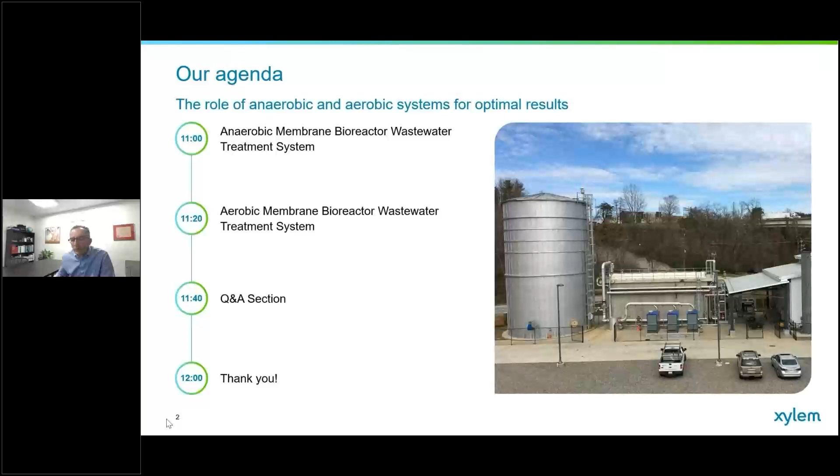Once again, my name is Jose Molina. I work in business development with the ADI Systems team, which is part of Xylem. I've been working on all kinds of biological wastewater treatment projects for all kinds of industrial customers for close to 30 years now. So I'm not an expert, but I know where to call if you have a technical question for us. I think we can try to answer and address your technical questions as we move forward.

So very brief company overview about Xylem. Xylem is a very large company. It's a recent combination of two large water companies. Xylem and Evoqua came together about a year and a half ago, and combined we are trying to have global coverage, fairly large in terms of revenue, in terms of coverage around the world, and the number of employees that work on our teams.

What we're trying to do is address our customers' needs in anything that has to do with the water cycle, whether it's on the clean water side of things or on the wastewater side, which is where I personally have been more involved over the years. Again, this is something that we endeavor to cover for our customers around the world.

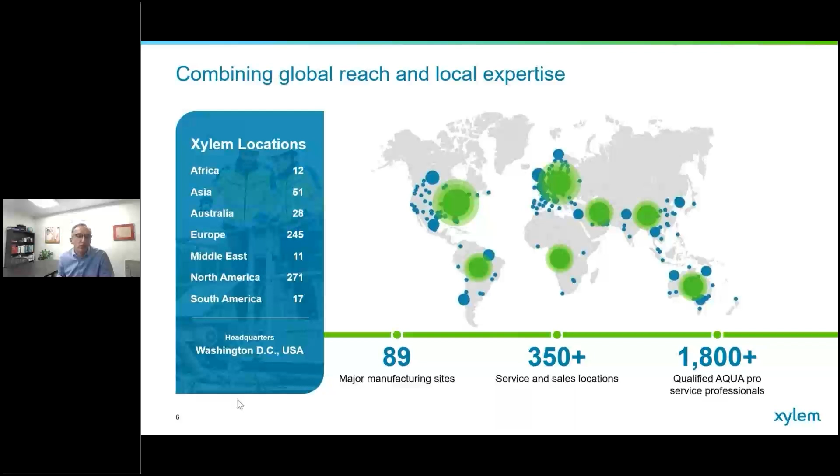So in the title of the presentation, we have the word sustainability. That's a bit of a buzzword, but I think that's something that we've lived over the years before the word was trendy in the first place. But we realized that sustainability can mean different things to different people. So just very briefly, I'll talk about what sustainability means to Xylem.

It's a big part of what we do. We make sure that we have a policy that's clear about how we as a company want to do things more sustainably, but also our effect on society. We have that outward looking viewpoint where we're trying to make sure that society itself is being protected in a sustainable way. And also we help our customers achieve their sustainability goals.

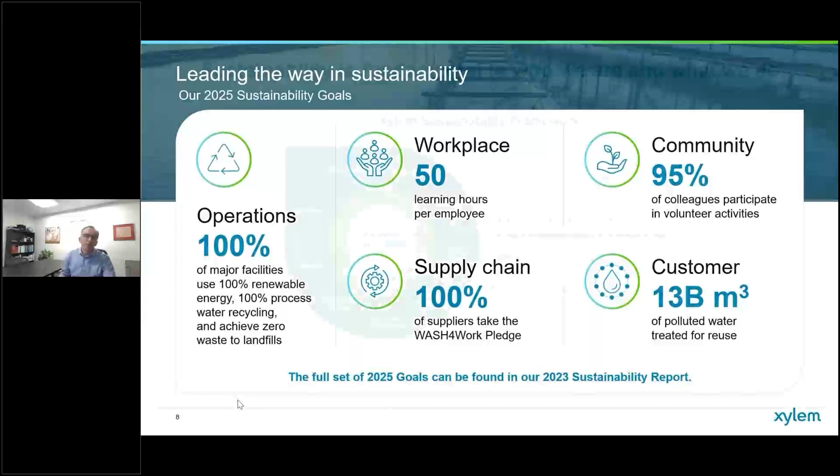So I think this chart kind of summarizes that. We're serving our customers and we're helping them achieve their targets. We realize that we don't operate in a vacuum. We operate as part of a community. So there's a lot of outreach that we do to help the community around our offices or our different sites, to make sure that we are always working with sustainability as part of our way of doing things.

And finally, as I said before, we work with our customers in helping them achieve their targets as well, in anything that has to do with water, wastewater, the whole water cycle. We're endeavoring to be part of that through all of our projects.

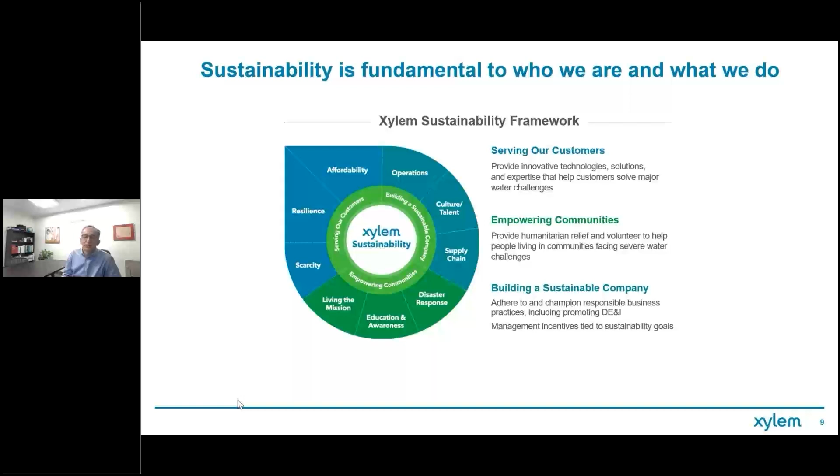So our sustainability policy and objectives are summarized in Xylem's sustainability report. The last version of that report came out after 2023. There is, of course, the 2024 report that will be released early in the new year, and you'll be able to read it and download it from Xylem's website. On the screen you see a link to where you can find our sustainability report.

Okay, getting back to our subject at hand. So our beverage customers - what does sustainability mean to our beverage industry customers?

Sustainability can mean a lot of things to you as a customer. It can be about your social commitments, or about your production processes being more sustainable - whether it's the whole supply chain, your raw materials and feedstocks, or manufacturing practices themselves always being improved with that objective in mind. Always looking to be more efficient in production, whether energy efficient or water efficient. As a user of clean water and a company that releases wastewater, you want to do it in a more sustainable, environmentally responsible way with your community.

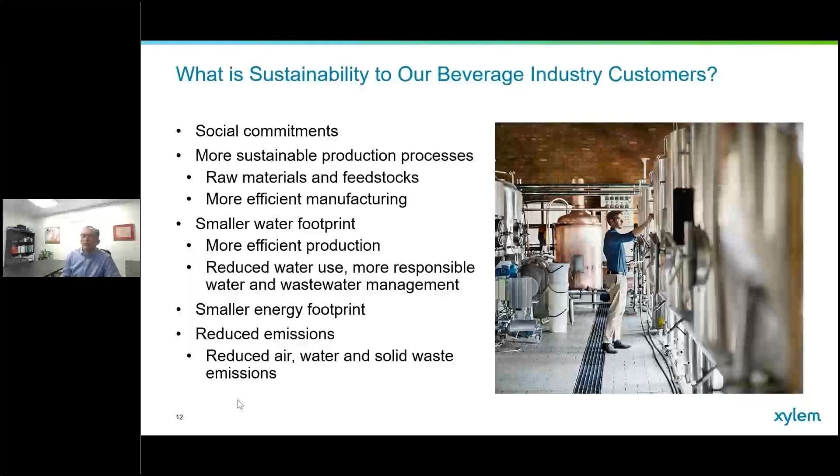As I said before, we chose a couple of examples where we can help a beverage company achieve sustainability objectives in different ways or in different categories.

In terms of anaerobic treatment, we can discuss some of the benefits you can get that address your objectives. One of them: if you're generating a wastewater that can be treated anaerobically, you're minimizing energy use in wastewater management. You're also, in some cases, recovering energy if you're treating a wastewater through an anaerobic process.

When you do that, you're generating biogas, and that biogas can be used as a source of green energy. Not only are you recovering that energy from your wastewater, but you're also reducing your use of carbon heavy fuels. If you're using biogas, you're not buying natural gas from the grid, or electricity that might have been generated from a coal power plant, for example. So those are different ways anaerobic treatment can help reduce that footprint in terms of carbon released to the atmosphere.

Also, if you're able to treat a waste stream or wastewater stream anaerobically, you will tend to generate less waste material in terms of waste solids. So you're also reducing what goes out to a landfill, for example. Those are also good objectives to meet.

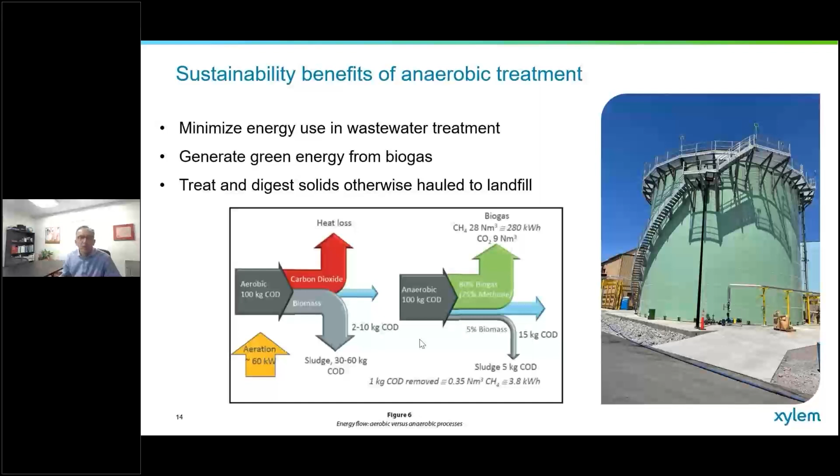So that biogas can then be used as a source of green energy back in production, whether it can be used in a process boiler or in a dryer back in the plant. It can also be used to generate electricity if the economics dictate that. And for the larger cases, the biogas can be cleaned as well and separated into its different components, and we can generate a renewable natural gas, which can then be put back into a pipeline. So those are examples of things that can be done with anaerobic treatment on a beverage wastewater. And again, we're trying to help our customers reach their sustainability objectives. This is a good way to do it.

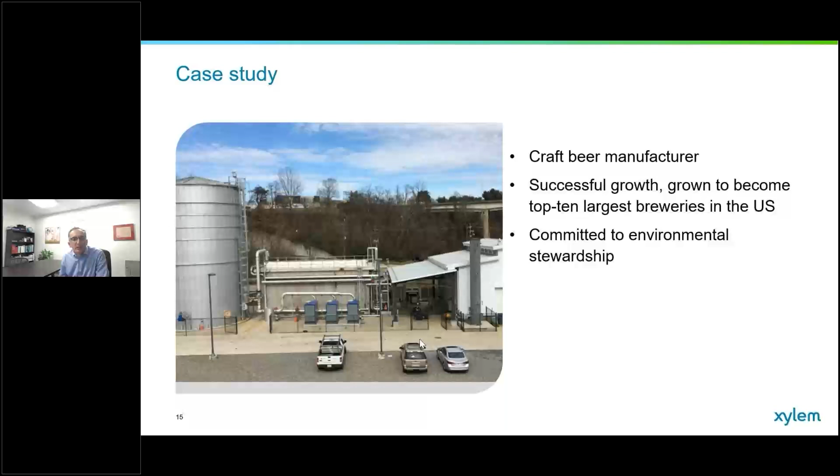So a very quick example on an anaerobic system that we've done in the past few years. This is a craft brewery in the United States. They had a brand new plant that they were building in the southeast of the United States. And of course, the company had sustainability policy and sustainability objectives that they were trying to meet. They were committed to environmental stewardship, and we were very happy to work with them in helping them to achieve those goals. So expansion was part of it. This is a medium size, I would say a medium to large size brewery that was being built. 500,000 barrels of beer is a good production level.

But they wanted to do this project and try to do it as responsibly as possible from the environmental or sustainability point of view. They also had an interest in not just meeting their discharge requirements, but going beyond that. They wanted to exceed minimum treatment requirements. And also on the solids handling side of things, they saw that spent yeast from beer making and also spent hops represented a bit of a liability in terms of having to dispose of those materials, and that would be a cost and also an environmental cost, right? So if you're transporting or you're trying to handle waste solids and sending them to landfill, that's not really the best way to handle those solids.

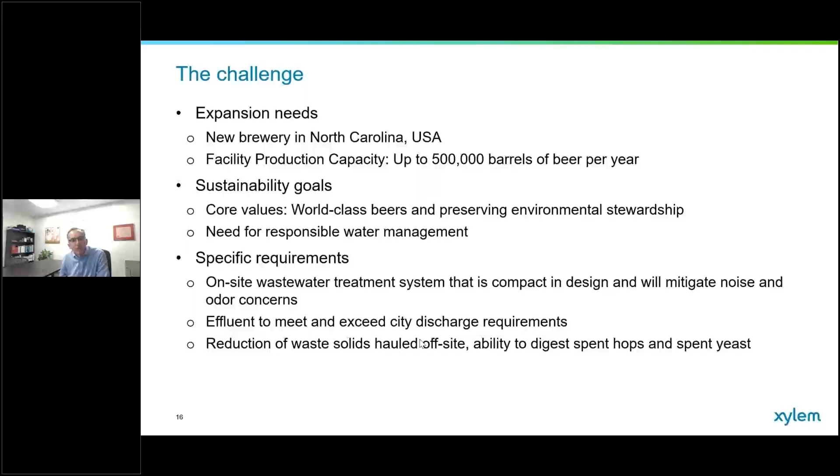So the anaerobic reactor that we designed for this customer, rather than separate and truck away, we sized the reactor such that those waste solids could be digested and also converted into biogas and into green energy. So it's a good way to reduce the footprint, not just on the emission side of things, on the water side of things, but also in terms of reducing waste solids going to landfill.

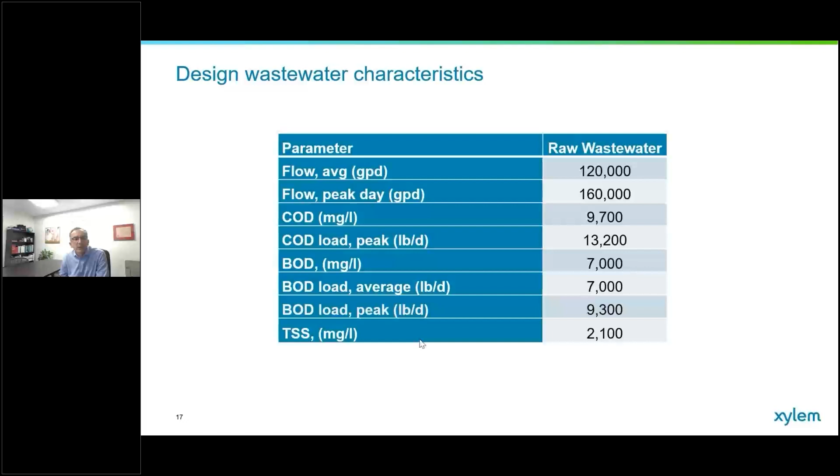Quick numbers on what the wastewater looks like. As you can see, the organic load in terms of pounds or kilograms of BOD or COD that were being generated in this plant and needed to be treated was fairly significant. And what we did for this customer on a design build basis was to build an anaerobic membrane bioreactor. I guess it's an improvement on conventional anaerobic treatment technologies, where we've added membranes as part of the treatment train, which allowed us to have a very robust system, a system that can handle the solids, and a system that can transform most of that 10,000 pounds of BOD that I was talking about into biogas, rather than having to put an energy input in terms of aerobic treatment to be able to treat that wastewater.

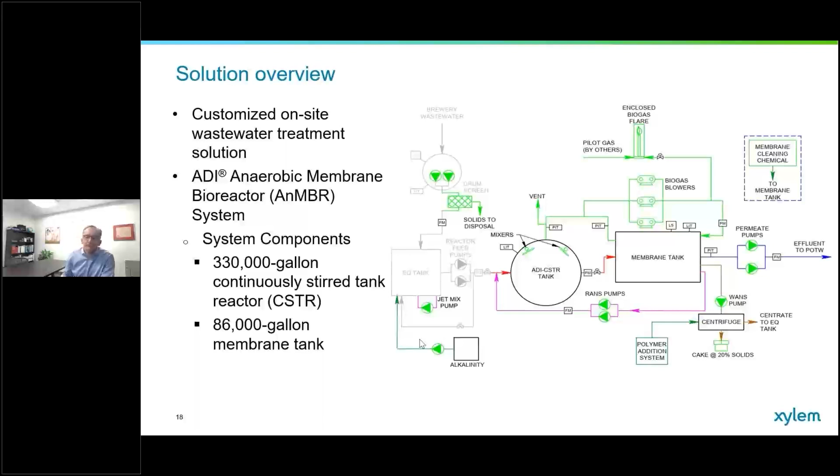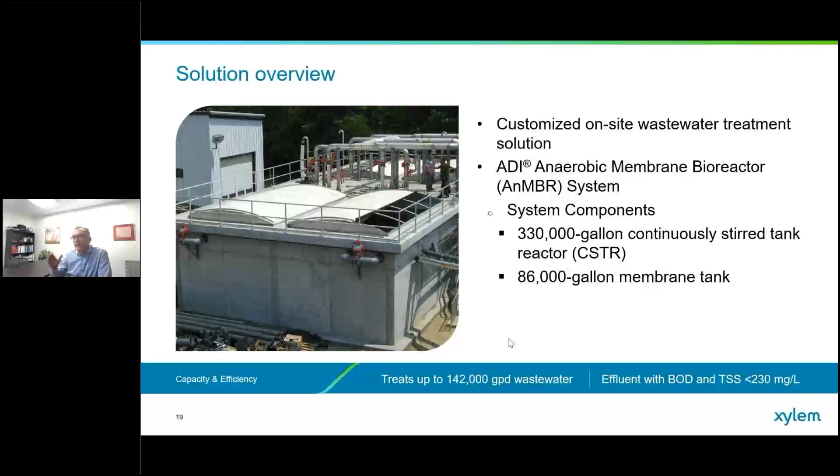So the concept of anaerobic membrane bioreactor is that we have the ability to make a more compact biological system, but the fact that we're using membranes to separate the treated effluent from the bacteria gives you a very, very high quality effluent, because the membranes that we're using to separate the liquid ensure that all of the bacteria remain in the reactor, remain in the system, and can then be used to continue to do their work, rather than losing those bacteria into your effluent.

Being able to capture the solids also means that the effluent, the treated liquid that comes out of the system, is very clean. It doesn't have any suspended solids in it, and we achieve very high COD and BOD removals through the system. So again, this is one example of where we've used flat plate membranes to do that membrane separation, to do that solids liquid separation, to get you a very clean effluent.

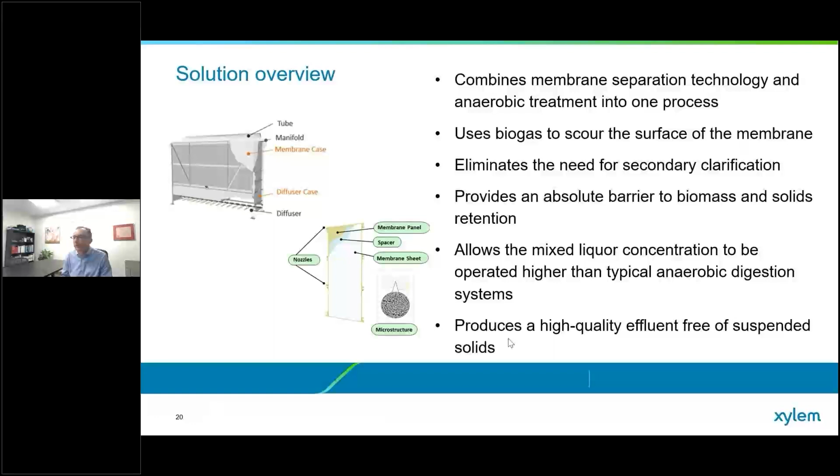So we think this has been a very successful example of being able to treat a fairly high organic load coming out of a beer production facility. We're checking several boxes in terms of the sustainability objectives being met: reduction of energy used, high quality water coming out, and reduction of waste solids that need to be handled and disposed of. So those are examples of how we can do that.

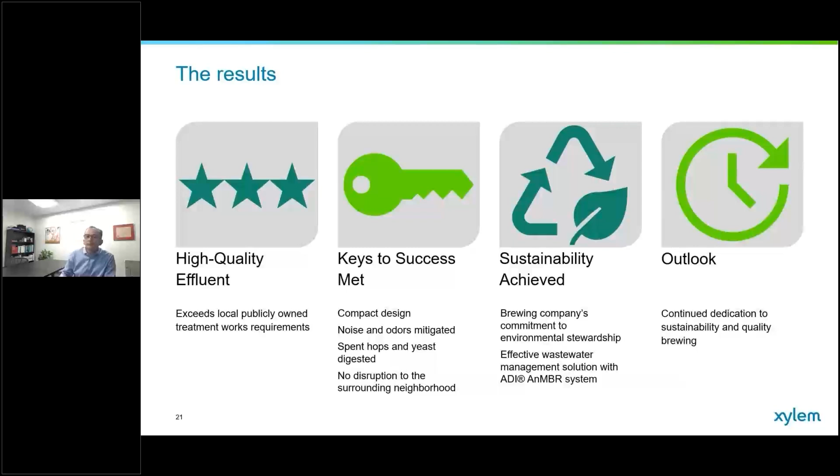I should mention, as I said at the beginning of this section, for some of our larger projects the amount of biogas being generated justifies doing the extra biogas cleaning and handling. That allows some of our customers to convert that biogas to renewable natural gas. You have to separate out the carbon dioxide and other impurities, but you can then put the biogas into a pipeline, and there's plenty of incentives out there. We'll be happy to talk to you about your particular needs to see if generating RNG, renewable natural gas, is a good option for your facility.

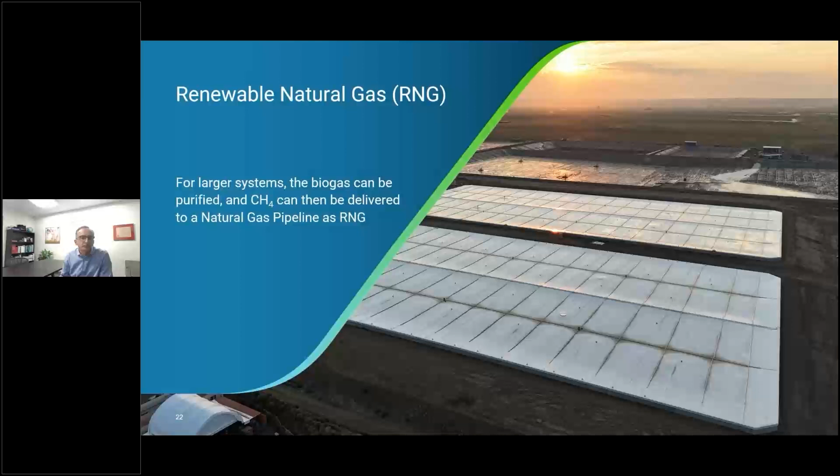Okay, so getting back to aerobic treatment - anaerobic is a good way to achieve some sustainability objectives. When you do aerobic treatment, there's also a series of objectives that can be met by doing that design right and applying the right technologies to help you achieve your treatment objectives.

So I'll go back to that chart I showed before comparing anaerobic treatment to aerobic treatment. If we focus on the left side of that chart, as I said before, there is an energy input to doing treatment aerobically, but you can do it efficiently or less efficiently. That's one thing we can work with your team on, to make sure the design of an aerobic treatment system is done with sustainability in mind - that we have as efficient an aeration system as we can, and that the equipment, pumps, mixers we use in our treatment train are selected with energy efficiency in mind, so we can continue to help you achieve those objectives.

But also, as I was saying earlier, the quality of the water that comes out of an aerobic treatment system can be high enough that you can maybe achieve different kinds of sustainability objectives. Having clean treated wastewater means it may open doors to water reuse, for example, or being able to meet emissions to water bodies and discharge water that's much cleaner for the environment, meeting direct discharge limits that, as you all know, are getting tighter and tighter with time.

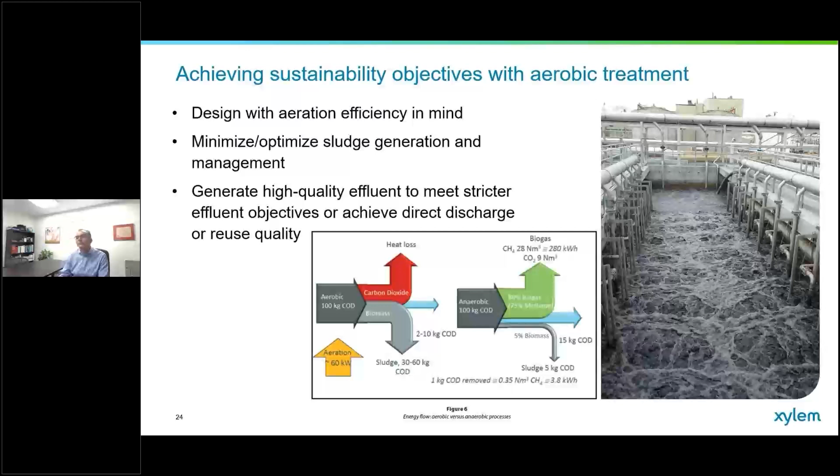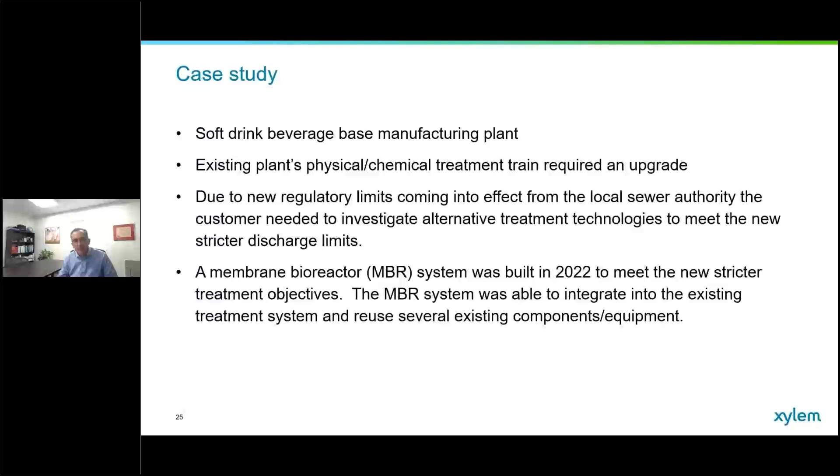So a quick example of a project we've done in the recent past on the aerobic MBR side of things - aerobic treatment achieving fairly high quality - is a beverage plant in the US, where the plant was being asked to meet a more stringent BOD, nitrogen, and especially phosphorus objective for discharge. The solution consisted of, again, a membrane bioreactor. In this case it's an aerobic membrane bioreactor, but it's a similar concept to the one I described with the anaerobic system. Just very quickly, what is an MBR?

A membrane bioreactor is a variation or an improvement on a more conventional activated sludge process. As you know, with activated sludge you're using a consortium of bacteria aerobically, so you're adding air to those bacteria so they can do the work. As the bacteria receive air and food, they can do that conversion and cleaning of the water so that you can reduce the organic matter that goes out to your final effluent.

Typically, the design of an activated sludge system is based on how much bacteria, how much biomass, or how many workers you have to do the treatment, and that's limited by volume. So the larger the system, the more bacteria, the more workers you have, the more wastewater load that you can clean.

So of course that means you need a lot of space to do your biological treatment. Another bottleneck in the design of conventional activated sludge systems is that you have to separate treated effluent from the bacteria, because you want to keep the bacteria in the system. Normally a conventional treatment train requires gravity settling, so your bacteria settle to the bottom in a secondary clarifier so they can be returned to the main treatment train, and then you release clarified effluent. So the bacteria stay, clean liquid goes out to discharge.

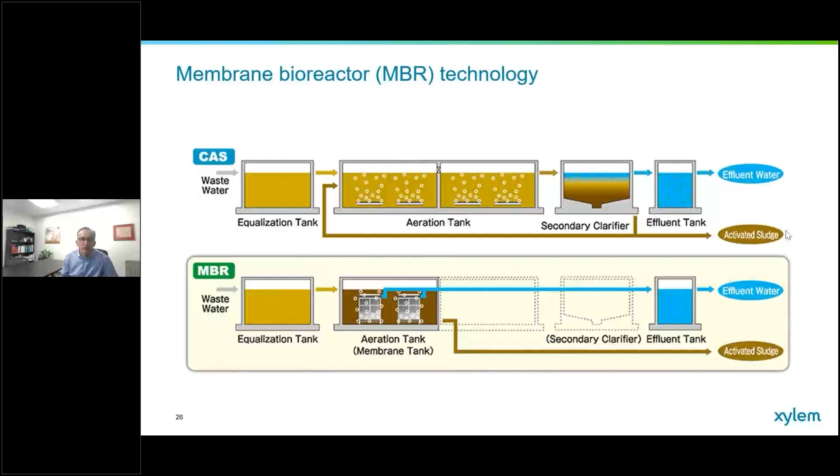Those are huge benefits that you can get by doing that. And of course, the fact that the membranes are capturing all of the solids in your final effluent means the water has a much higher quality because there are no solids in it. Very low BOD - the level of BOD removal you get is much higher than you have in a conventional system. So that means you're checking off more boxes from the sustainability side of things.

We use air that we bubble in through the bottom of that membrane cassette, and as the air bubbles rise in the liquid, they create a scour effect that keeps the membranes clean. And you get a cross flow effect, so the clean effluent goes through, and the sludge keeps getting recirculated inside of the reactor.

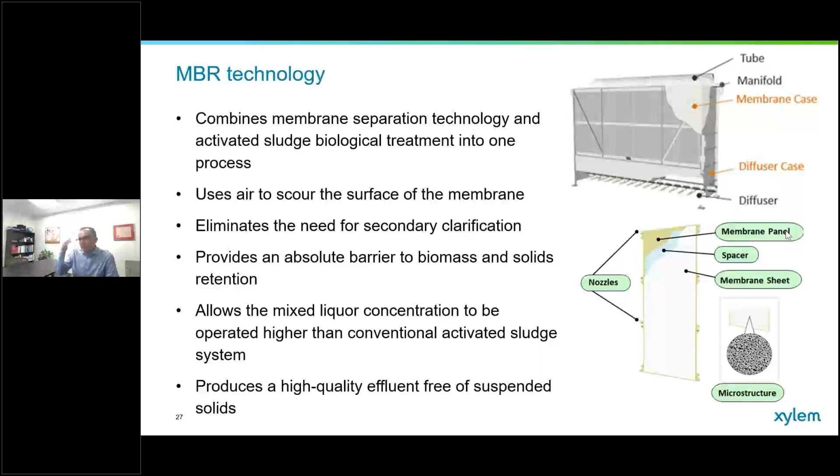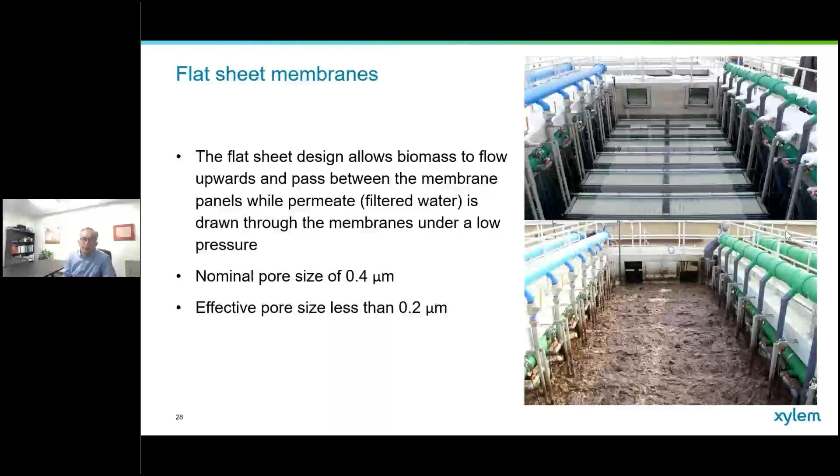And as the liquid goes through the membrane pore size, which is very small, 0.2 to 0.4 microns, what you have going through is a treated effluent with no suspended solids in it, and very high removal of nitrogen, phosphorus, and BOD.

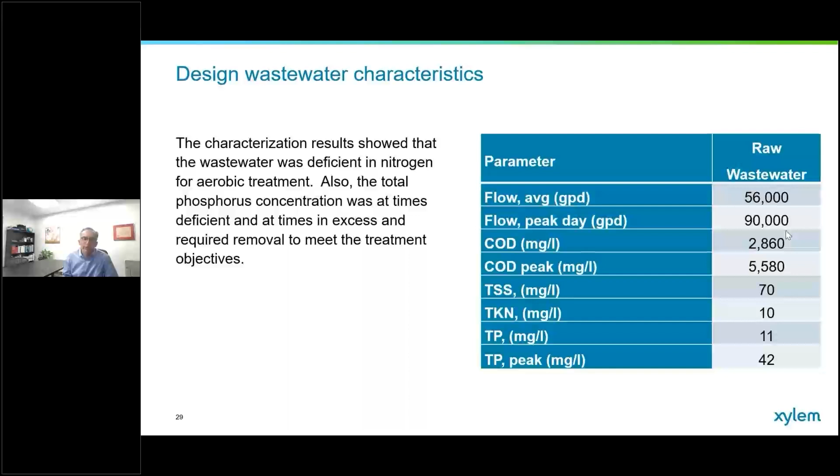So this is a wastewater that's still quite concentrated, maybe not strong enough to justify anaerobic treatment. But again, we are chasing other sustainability objectives in a different way. It's aerobic treatment - it's not as energy efficient as anaerobic treatment, but we can still do it as efficiently as possible while meeting other objectives, for example having water that's so clean that maybe it can be reused back in the process.

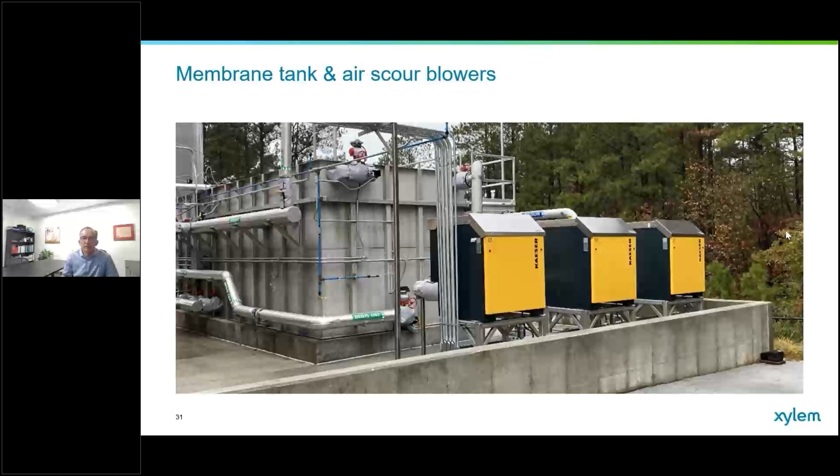As I said before, the air keeps the membranes from getting plugged up with sludge, so that the air creates a cross flow that cleans the water. But still, every few weeks or every few months, you might do a clean in place. You don't have to take the system down, you actually just stop flow for 2 or 3 hours, and you can do a clean in place with chemical, whether it's an acid clean or a hypochlorite clean. It's just done from time to time to remove material that might have started to get stuck on the little pores on the membrane.

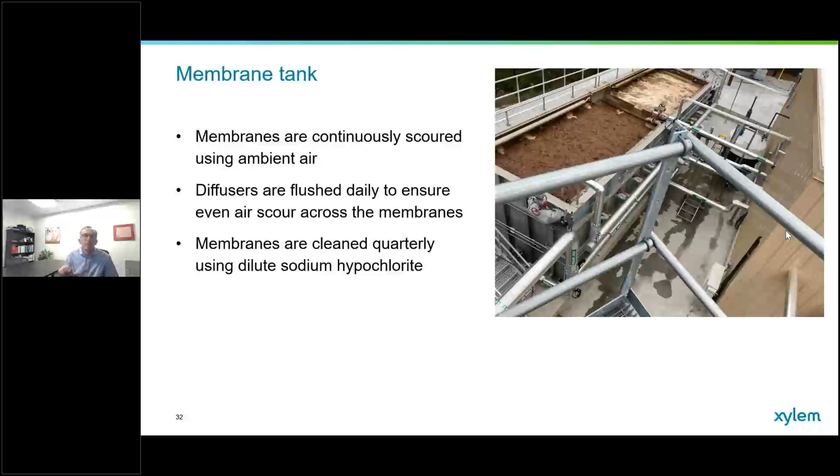Likewise, we were able to meet the total nitrogen limits that had been imposed, as well as the phosphorus limits. With phosphorus, we know that we're removing some of it biologically because the bacteria, as they grow, will absorb some of that phosphorus for meeting their growth needs. But there will be an additional phosphorus removal step by adding a coagulant, whether it's ferric chloride or alum, to precipitate it out with the phosphorus.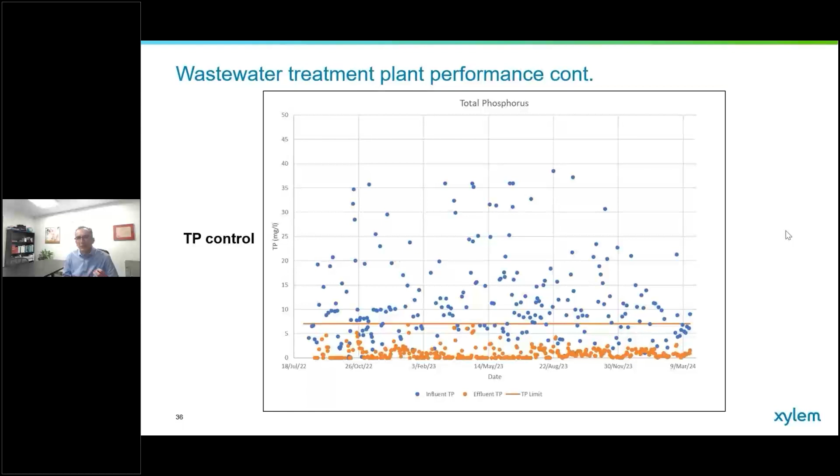The great thing about a membrane bioreactor is that once you've created that chemical precipitated sludge of aluminum phosphate or ferric phosphate, we can capture those solids because we have the membranes keeping them from going out in your effluent. So having no suspended chemical sludge, and the bacteria also staying in the reactor, means that we can meet less than 1 ppm phosphorus limits. In some cases, we can remove another order of magnitude and meet quality more in the range of 0.1 or even less milligrams per liter of total phosphorus.

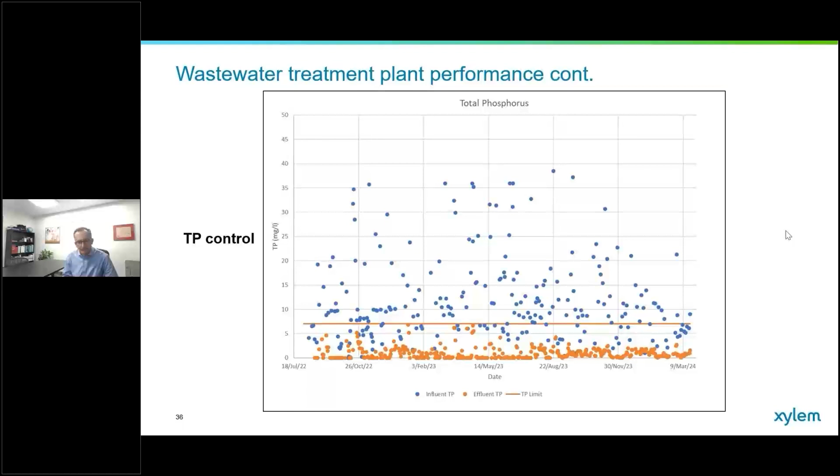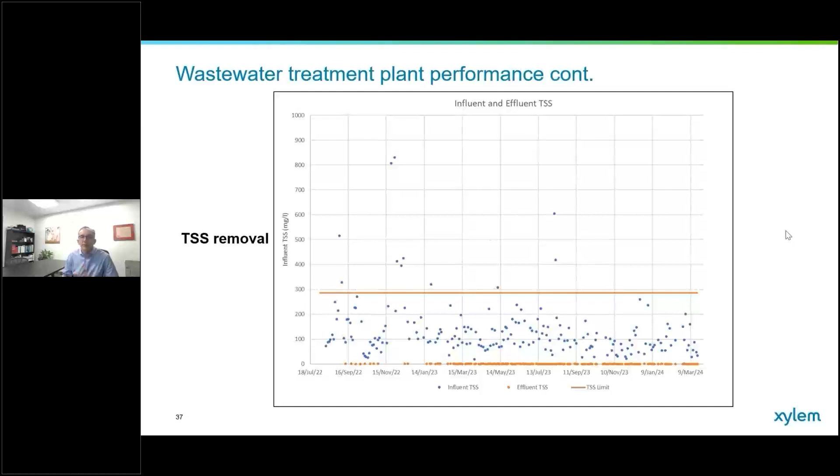Same thing for total suspended solids, I've made this point a few times already. The concentration of suspended solids in that final effluent is non-detect, because by definition the pore of the membrane is capturing all of the suspended solids that are in the system, so nothing can get through the membranes.

Just a very quick summary of performance of the system. As you can see, there's still a little bit of organic matter in the wastewater that maybe is not degradable, so 30 ppm of COD, but the BOD is non-detect in this system, so we were achieving 99.9% BOD removal. TSS is practically all removed, and we're also achieving 0.6 milligrams per liter of total phosphorus in your final effluent. So again, it's very, very clean water.

The additional point I was making earlier about making water aerobically this clean is that now you can see if there are other objectives you can meet on the production side of things. Can you be more water efficient? Yes, overall for the production plant, you can be more efficient if some of this water can be used back in the process in some way, and that reduces your consumption of city water or well water that you might be bringing into the plant. So again, that helps you achieve objectives you might have in terms of water use in production as well.

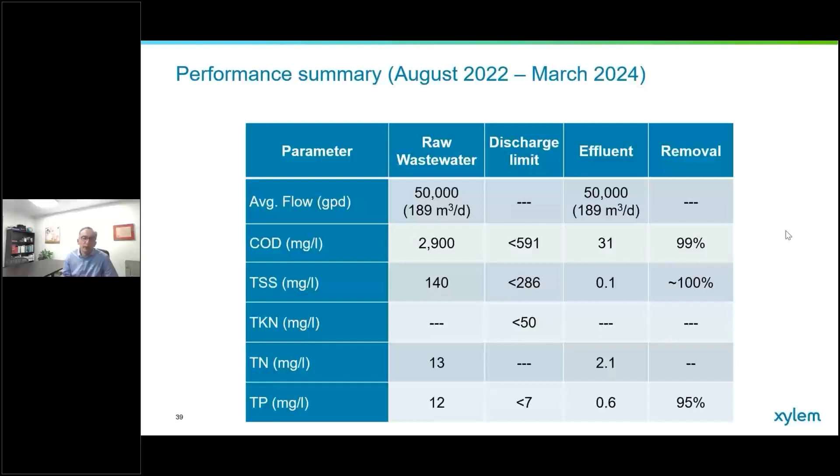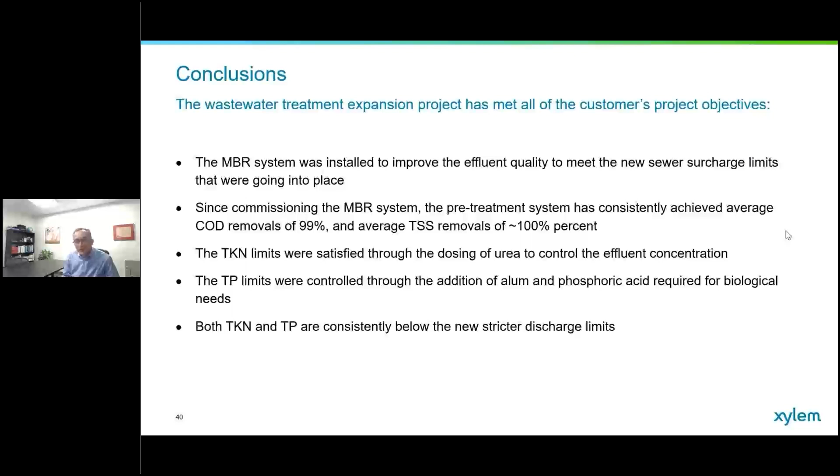Finally, in some cases, that water can be fully recycled if, for example, you were to feed that treated wastewater through an MBR system into something like a reverse osmosis system, and that can give you ultra pure water that may even close more loops in terms of water consumption back in production. So those are just some examples I wanted to touch on in terms of how you can use wastewater treatment designed properly to help achieve your sustainability objectives in production.

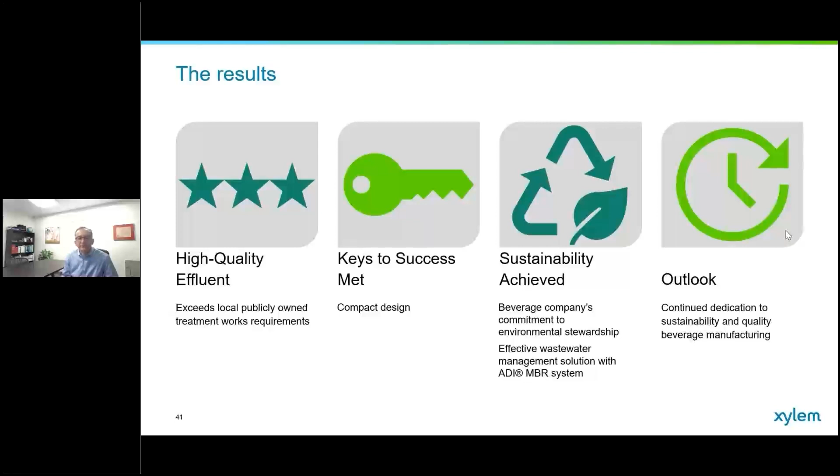This is just a summary of results. Again, we're very happy to look at each specific plant if you have specific needs on the water and wastewater side. We're always happy to work with teams and see how many of those sustainability boxes we can help you achieve.